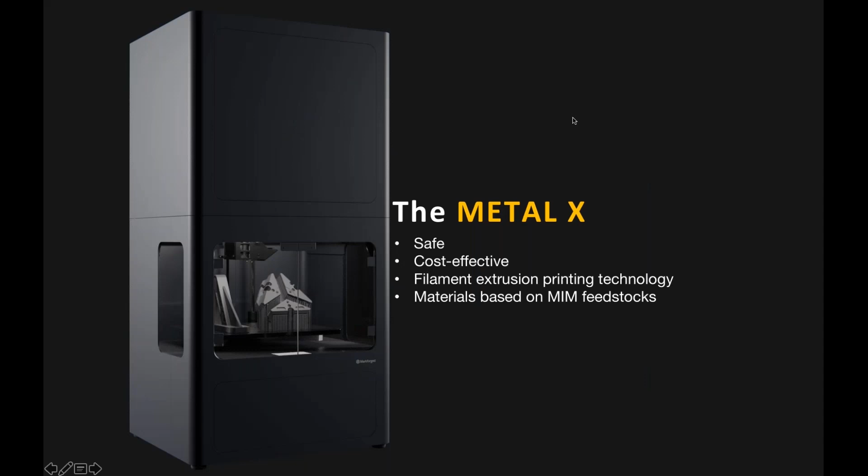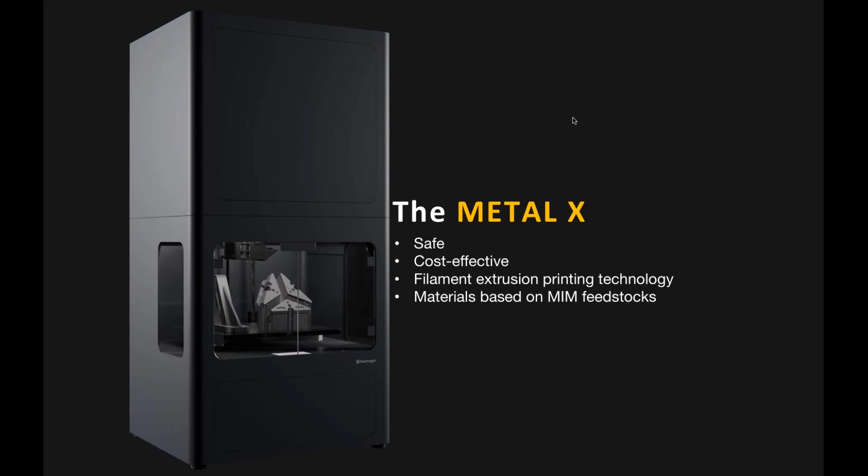But first, I really want to talk about our equipment before we go in on how to design for it. So our metal printer is called the Metal X, and it is based on metal injection molding plus 3D printing combined. So we use something similar to a MIM feedstock, and this is a metal powder bound in a wax and a plastic, which allows you to form it, extrude it into the shape that you want to then have your final part as. This technology allows it to be more office friendly, a little more cost effective, and a bit safer than all of those powder techniques.

So our process is called ADAM, Atomic Diffusion Additive Manufacturing, and you put your design, your STL file into our Eiger software. Our software will automatically scale it up about 20%. This allows us to account for shrinkage that's going to happen during the sintering process. And then it goes into a wash to remove the wax portion of the binder, and the sinter to remove the polymer portion of the binder, as well as to create your fully dense part. So you design your part that you want to come out, and then our software will automatically scale that up for you. So what does this look like?

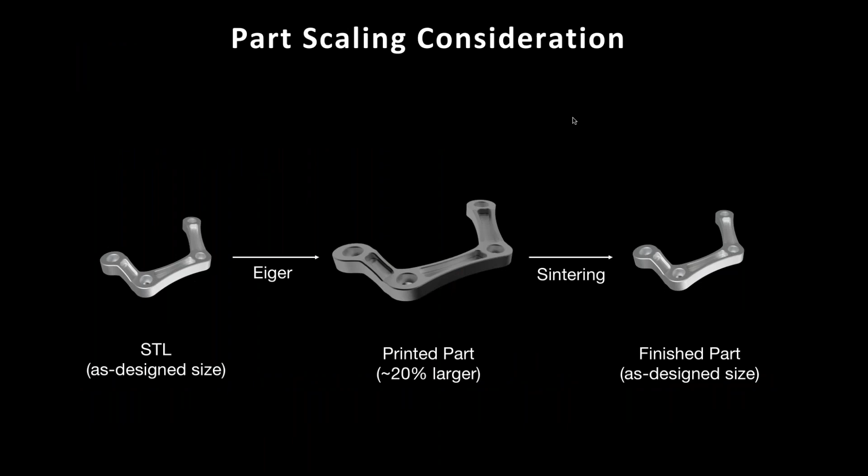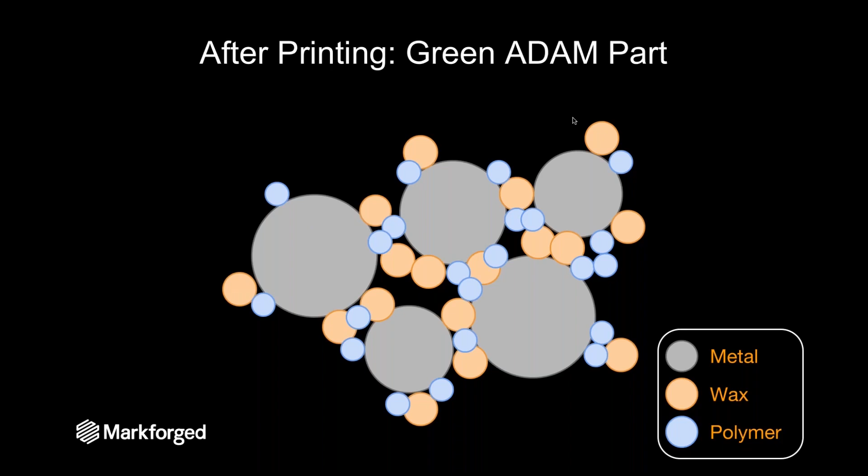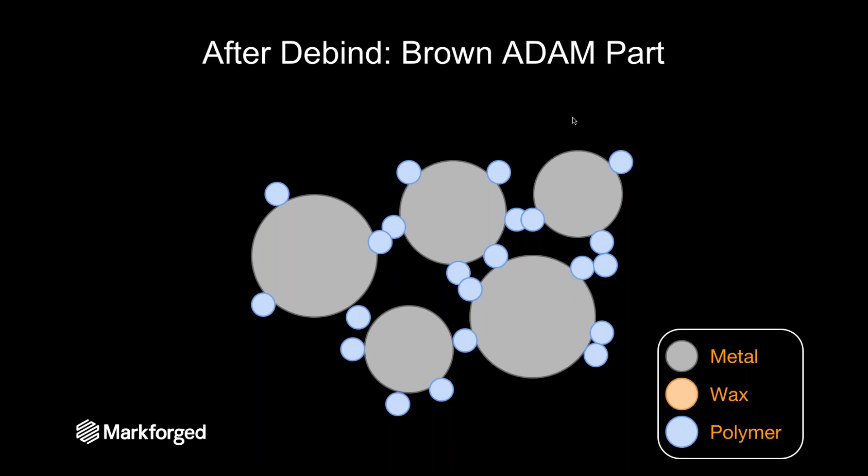So I'm going to go into a more internal view of what's happening to our parts. As you print it, you have all of those wax and polymer binders that really hold the part together before you actually get to the sintering step. During our printing process, we don't melt any of the metal powder, so we don't get that hot, but we do melt the binders to help create the green part, as we call it. So after the wash station, we have debound the wax portion of the binder. So we have the rest of the polymer holding it together until you can then put it into the sintering oven to start tacking those powder particles together, and then eventually getting your post-sintered dense part.

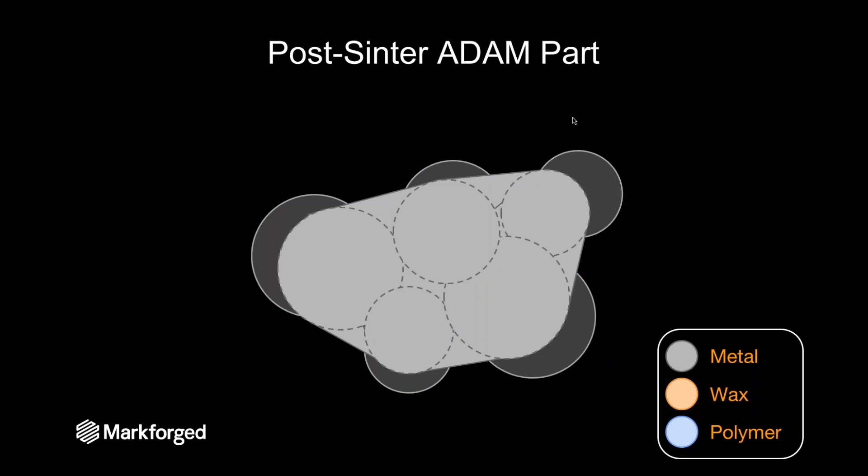So now that we've talked a little bit about that, I'm going to go through the steps you need to take to have a successful metal 3D printed part. The first is meeting the economic requirements. Then it's choosing a part with suitable geometry and modifying or designing it for additive manufacturing. You also have to plan ahead if you need any post-finishing operations. Our parts come out at near net shape and the tolerances are pretty good, but if you need something really tight, you need to plan for taking off material post-sintering.

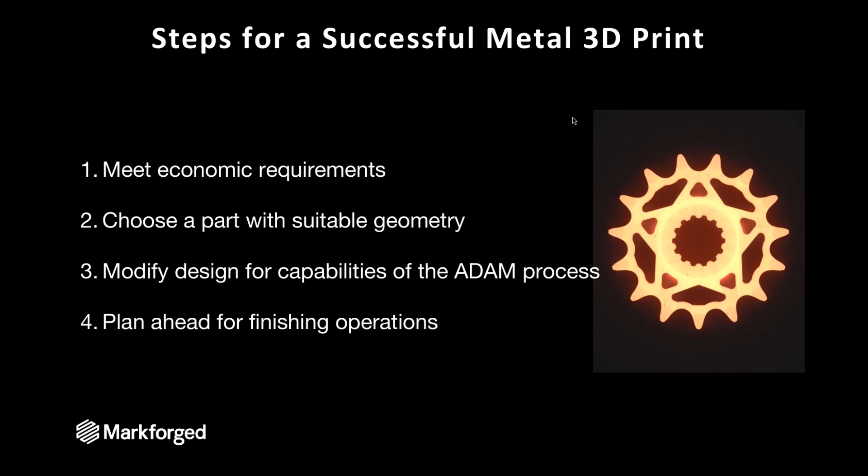All right, so meeting economic requirements. I'm going to go through this briefly. This is a cost comparison curve, where additive manufacturing is still going to be those high value, high cost, low production volume parts to make them very cost effective. This isn't the only thing you think of when you want to 3D print a part.

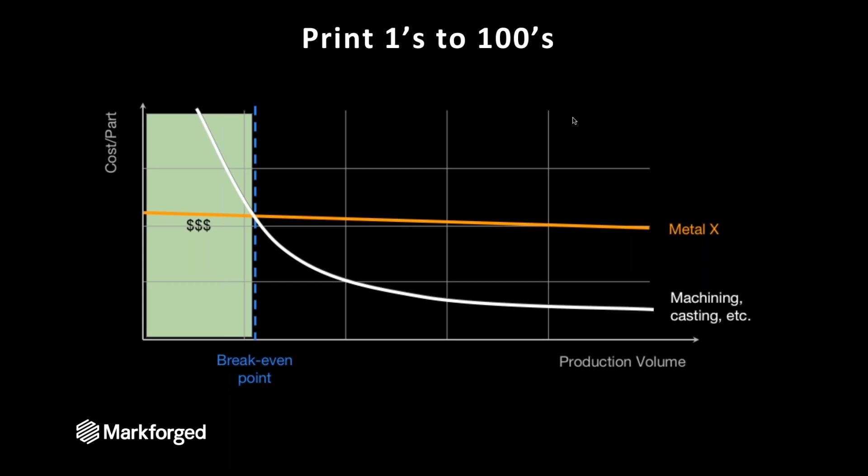We have these things we call secondary benefits, but sometimes they're even more important than just the cost and time to make the part. This can include saving weight on a part that an operator is moving around, and anything like that sort. That may not be as cost effective, but it makes someone's life better. It makes parts easier to move around. You can create multiple parts into one assembly, kind of like our Stanley Black & Decker part, which I'll show you in a bit.

Another cool thing about our software is if you have a metal part in mind that you want to print, you can pop it into our Eiger software, and these part details tell you how long your part is going to take to print, wash, and what the material cost is.

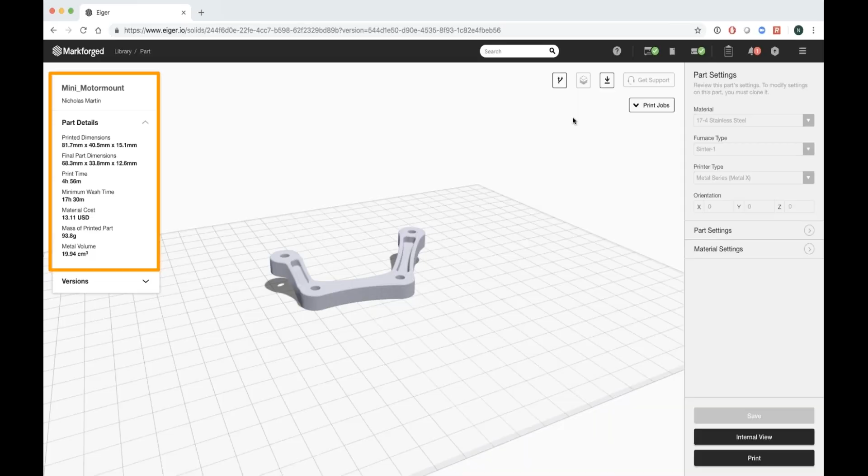All right, so choosing the right part geometry. This is probably one of the harder steps to do. 3D printing is not good for everything, and I won't be the person that tells you that it is.

Some things it's not great for are parts designed for other manufacturing processes. So parts designed for metal injection molding, or any sort of machining, may not be great for 3D printing unless you redesign it, because these parts were designed for those specific processes.

So we always have to take that into consideration when trying to get your part 3D printed. Other geometries that aren't that great are any sort of off-the-shelf hardware that you can just buy cheaply at a store, or parts with high aspect ratios - either very thin, flat parts or tall, skinny parts. Anything like that may warp during sintering because you always have the factor of heat and gravity acting on your part when it's in the sinter oven.

But one thing you might be able to do is create tooling for all of these off-the-shelf parts and hardware. So it might be as simple as that. If you have something custom you want to make, but our printer might not be great for it, you can always create tooling for that instead.

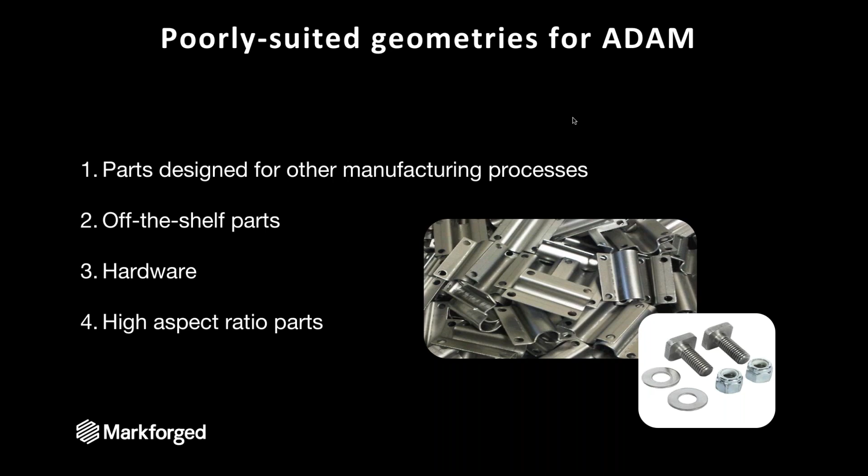Some of the well-suited geometries are castings, some machine parts, die-cast parts - anything that's a little thicker in dimensions. But these parts may still need to be redesigned for additive to get them to be truly successful.

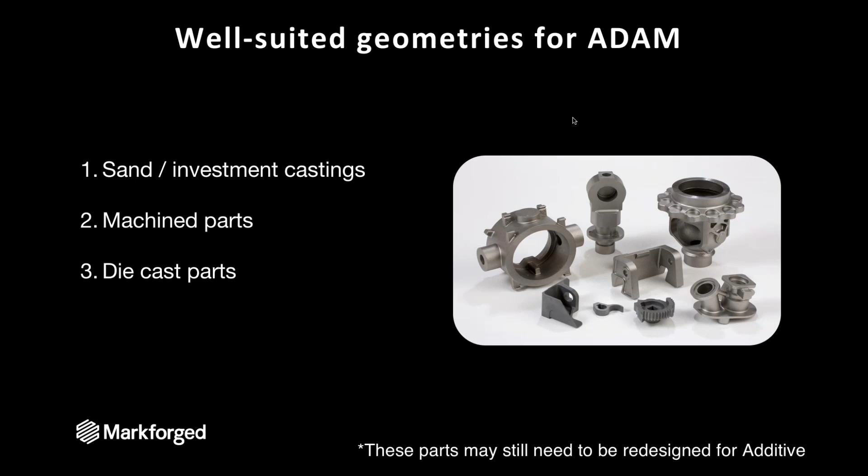Granted, there are parts that you can just take from one process, put it on a printer, and you get it out the next day and you're good to go.

All right, so redesign for additive. I'm a huge proponent for this. It's kind of difficult to do, but this is the Stanley Black & Decker part I was talking about earlier. Originally this part had a cast component, 2 bolts, and a regular plate. With 3D printing, we could combine this into one part instead of 4 different components. This not only saved time, but it was also cheaper.

We used these triangular or teardrop shaped holes because they were self-supporting. Since this hole is curved, you wouldn't be able to remove the supports. So designing it with those self-supporting holes allows you to not need supports at all.

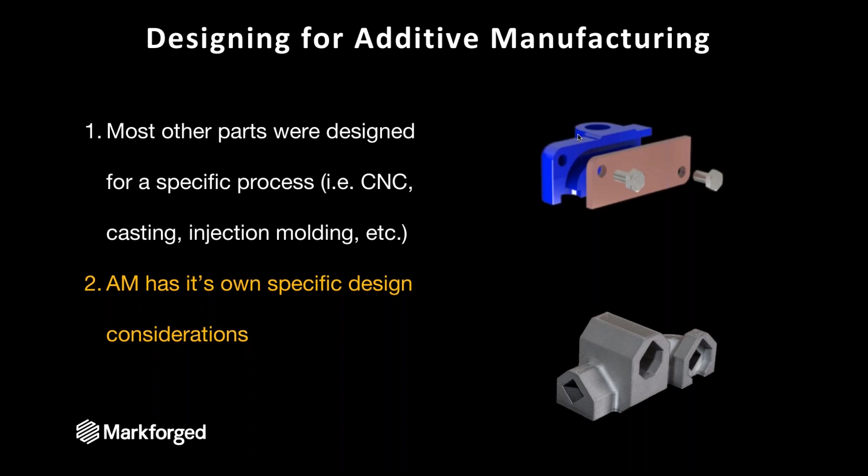So anything else? Design for additive manufacturing has its own design considerations that you need to think about when you're either choosing a part or redesigning it for 3D printing.

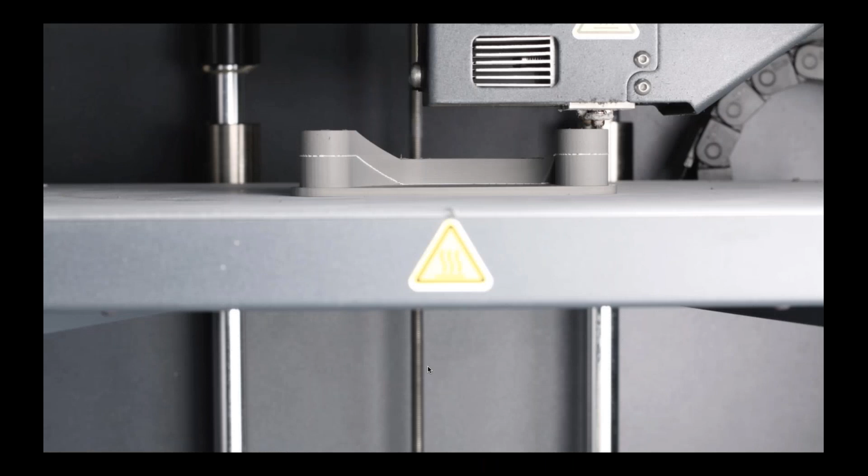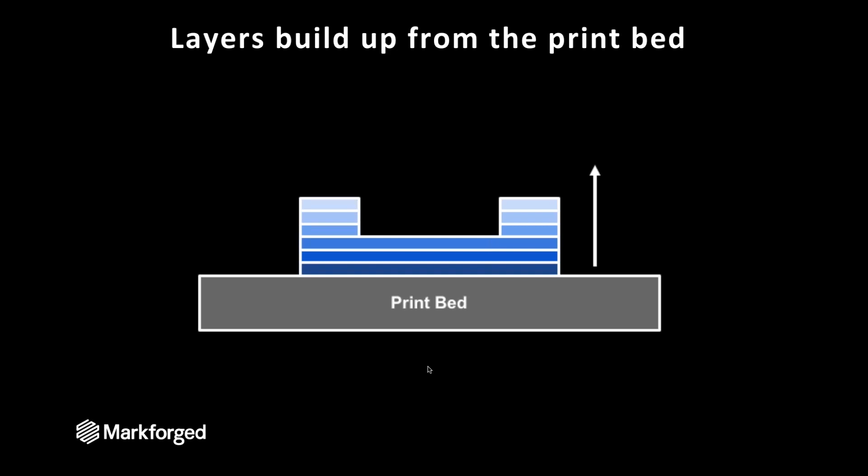All right, so we're going to talk about designing for printing first. Our process is an FDM style process, and you go layer by layer till you get to your final part. So you have to think about how each of these layers is going to interact with the next one. The part on the print bed right now looks pretty straightforward - that's absolutely how you would print it to get a successful print.

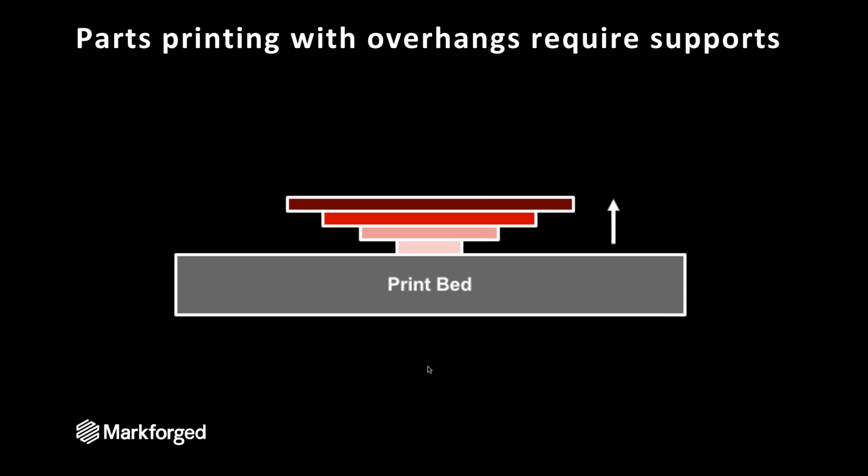Sometimes it's really important to have a lot of supports, other times it's not. I can give you some base details, but this process is very geometry dependent, and you're probably going to have to play around with it to really get the part, orientation, and geometry that works for our process. So this is kind of an example of support material.

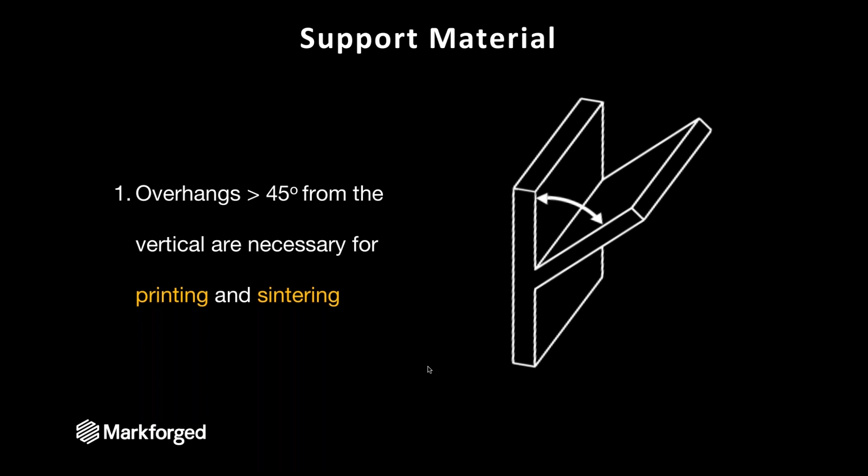Everything over 45 degrees from the vertical requires supports for both printing and sintering. Sometimes our part will generate supports that maybe aren't necessary for printing, but they definitely are for sintering, because if you think about it, there's that gravity-heat aspect that goes into these parts that may cause it to warp or sinter improperly.

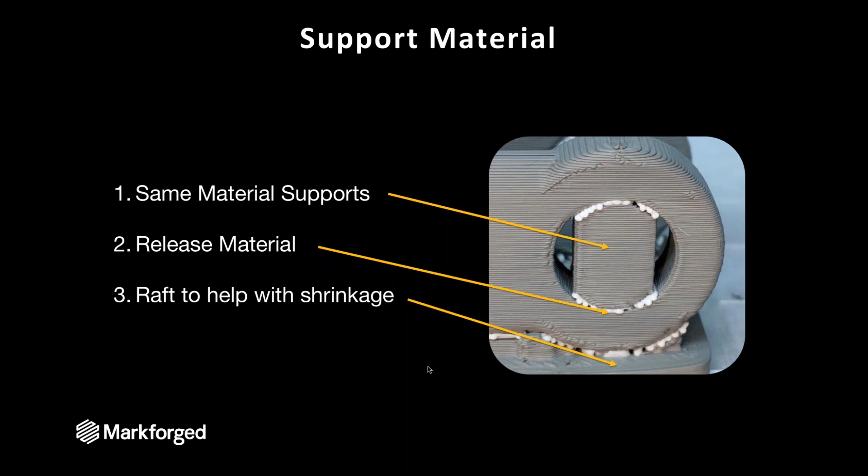Also, we print all of our parts on a raft. This allows us to have uniform shrinkage and make sure all of our parts shrink uniformly, so we can get your part as dimensionally accurate as possible.

Another important thing is print orientation. Sometimes more supports are better, but you also want to make sure that your part has contact with the print bed. Again, if you have a tall, skinny part, it may warp during sintering, so you have to be cautious when printing funky geometries.

You want to make sure you optimize those parts and have maximum bed contact. And if you do have very critical dimensions, the XY dimensions tend to be a bit more accurate than the Z direction, especially if you're talking about holes that may have some force on them during sintering and may slump a little bit.

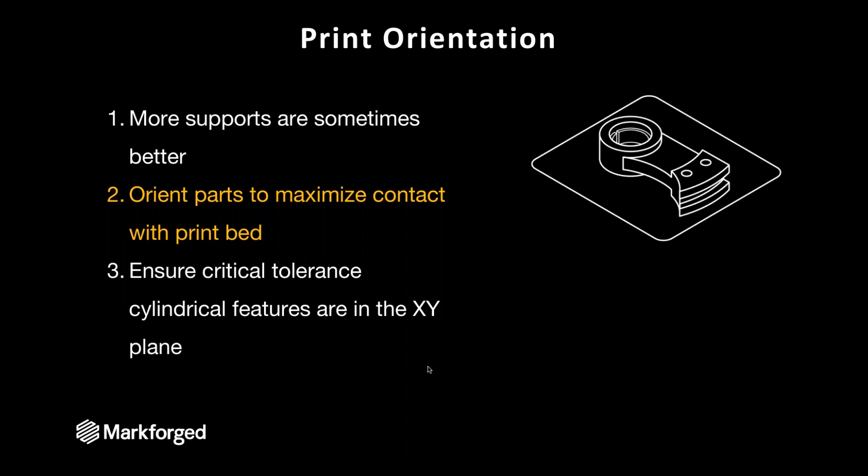All right, so design for wash. I wanted to put this in here just to draw attention to it, but a lot of the time we don't necessarily design for the wash step of the process because sintering is the most critical step. 3D printing, FDM style, has been around for a while, but sintering is definitely the more difficult part of this whole process. So if you design for anything, design for sintering.

So the wash - what the liquid does is remove the wax portion of the binder. This wax portion of the binder has to penetrate through the entire part before it is done washing. So your very thick cross-sectional parts are going to wash much longer. But if you were to add some sort of hole in your part, or shell the part, kind of like the Eiger sample I saw, you can decrease your wash time if that is a concern.

A lot of the time, though, since the wash process is a batch process, you can put your longer washing parts in at the beginning of the week and your shorter washing parts in at the end of the week, and then run a sinter run over the weekend to make sure all your parts are fully washed.

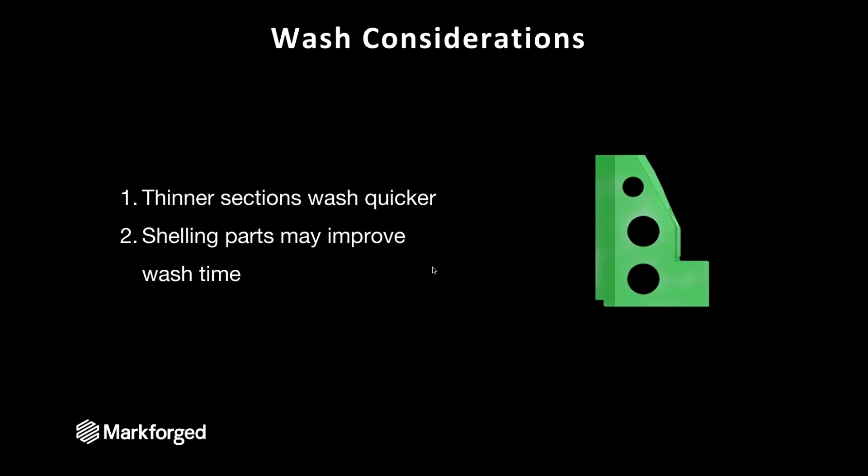All right, so design for sintering. Some of these considerations include filleting sharp edges. This can prevent warping - these sharp edges can act as stress concentrators, which can make your part not be completely accurate. And then also supporting top-heavy cantilevers.

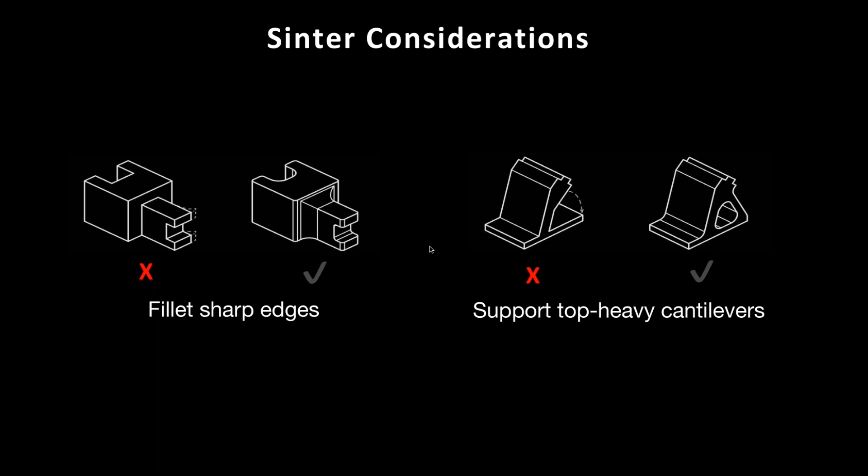So I was mentioning the high aspect ratio parts, and some of these, again, more supports are necessary. The part on the left with the X probably wouldn't sinter very well and may collapse because it is very top heavy. If you think about the heat and you have this metal sandcastle, it may fall apart if it's not supported correctly. So just adding in your own support, something like that, may help it sinter successfully.

And so I'm going to keep reiterating it, but you just have to be wary of high aspect ratio parts. Again, put the critical dimensions in the XY plane. Chamfering the bottom edges of your part may also help it shrink more uniformly, and you won't get any dimensional distortion.

Also, sometimes it's helpful to split complicated parts, and splitting these parts may be either helpful to get it to fit into the sinter oven, or it could help with the sintering itself. So again, if you have that high aspect ratio part and you just have a top-heavy part, instead of trying to add more support material or a cantilever, you can always split it up and then bolt it together later.

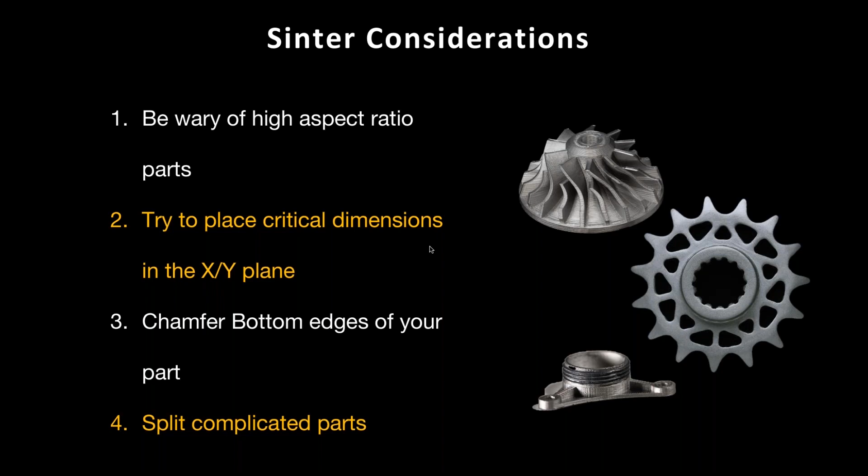All right, so the last step is planning for finishing operations. First, in the top left corner is no finishing, which is how the part comes directly off of our printer.

One cool thing you can do, because our parts are in the green state, is to wet sand them. This is great to smooth out all of the surface lines you may get in the part because it is 3D printed. But you may sacrifice dimensional accuracy a little bit because you don't really know how much material you're taking off of the part itself. This is more for if you need just a really nice surface finish.

So the next one is post-sinter sanding and polishing. Again, this is great because you can better control your part and get a nice clean surface, but you may again not be able to hit the dimensional accuracies that you would if you needed to post-sinter CNC machine it. So that's the final picture.

This really shows how nice our parts can look if you need to hit tighter tolerances, you can just quickly CNC up the surface to get those.

And then just a little summary. I really talked about understanding the 3D printing process, trying to understand how the process works so you can design effectively for it, talking about the ROI and how to decide whether you're going to 3D print a part, then talking about the right part geometry and redesign, and finally planning for post-processing.